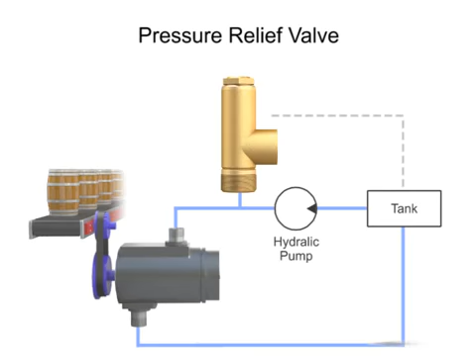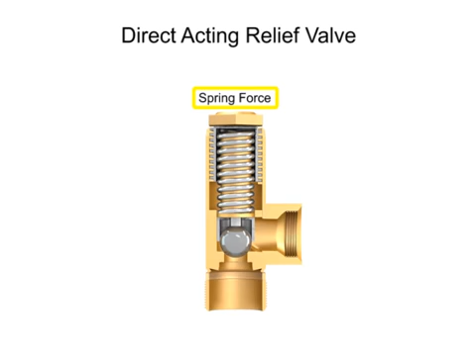Without a relief valve, pressure can continue to grow until another component fails and pressure is released. Pressure relief valves fall into two categories: direct acting or pilot operated. A direct acting relief valve is held closed by the direct force of a mechanical spring. The spring force holding the valve closed is opposed by the system hydraulic pressure.

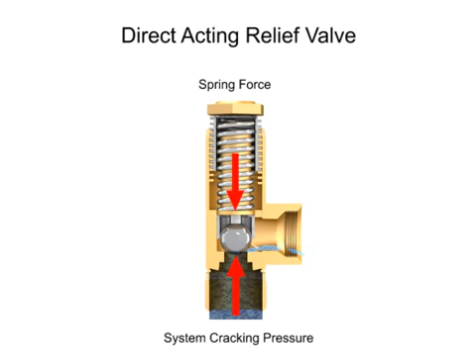The cracking pressure is the minimum pressure at which the valve will begin to open. This pressure is set by changing the tension in the spring using an adjusting nut or knob. As long as the system operates at a pressure at or under the cracking pressure, the valve remains closed. If the hydraulic pressure increases even a small amount beyond this level, the valve begins to open and fluid begins to trickle through. The pressure at which the valve is fully open is called the full relief valve pressure, and is higher than the cracking pressure.

When the hydraulic fluid in the system reaches the full relief valve pressure, the valve will be fully open and all fluid is discharged through the outlet port.

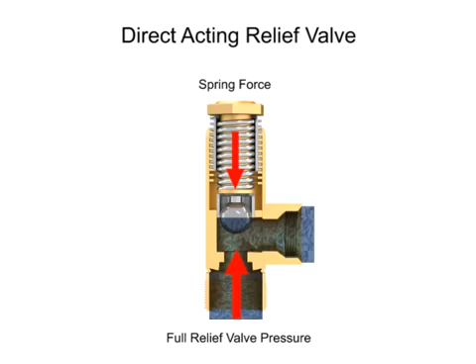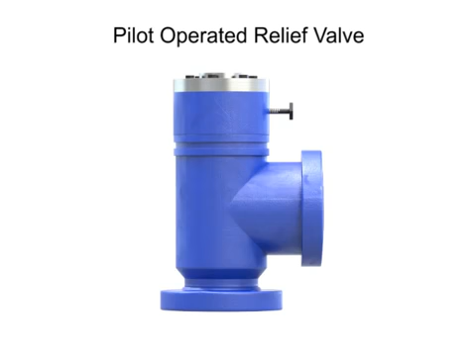A pilot-operated relief valve makes it possible to handle higher pressures and flow. It's also much smaller than direct-acting valves rated for the same pressure. This valve has two stages. The first stage is composed of the main valve with a poppet and spring large enough to handle the maximum flow rating of the valve. The second stage is composed of a much smaller direct-acting pilot valve, which includes a pilot relief poppet, pilot spring, and an adjustment knob. This smaller relief valve is usually mounted crosswise on the main valve body.

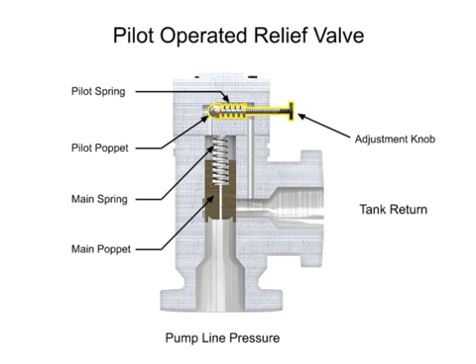As long as pump line pressure is less than the relieving pressure set on the control knob, the pilot poppet will remain closed. Since the pilot poppet is closed, the pressure in the main spring chamber is the same as the line pressure. Since these pressures are equal, there is no pressure drop from one side to the other, and the main poppet also remains closed.

When line pressure increases higher than the relieving pressure, the pilot relief valve moves to its open position. This allows fluid to flow from the pressure side through the orifice and across the pilot relief valve to the tank. Once the pilot valve is open, there is now a pressure drop across the main valve poppet with a higher pressure on the pump line side. This causes the main poppet to move, allowing full flow through the relief valve.

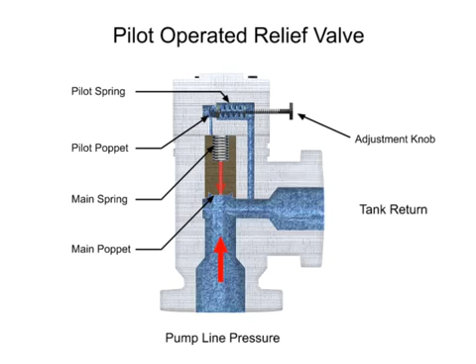The same is true in reverse. As the pump line pressure decreases below the relief pressure set by the adjustment knob, the pilot valve will close. This allows the main poppet to close and restores a balance of pressure.

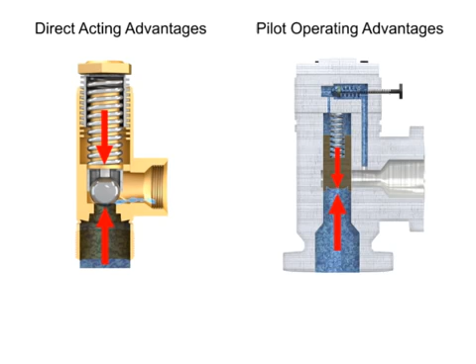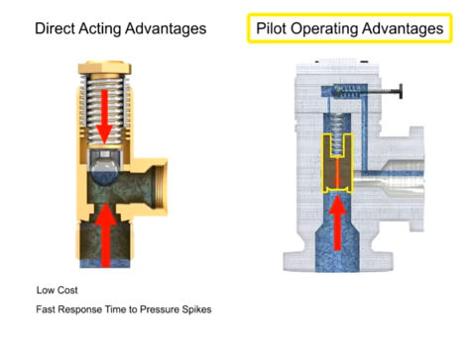Relief valves can be used anywhere in a hydraulic circuit where it's necessary to prevent pressure from exceeding a maximum level. Advantages of direct-acting valves are their low cost and fast response times to pressure spikes. Pilot-operated relief valves are advantageous due to their smaller size and ability to work with higher system pressures and higher flows.